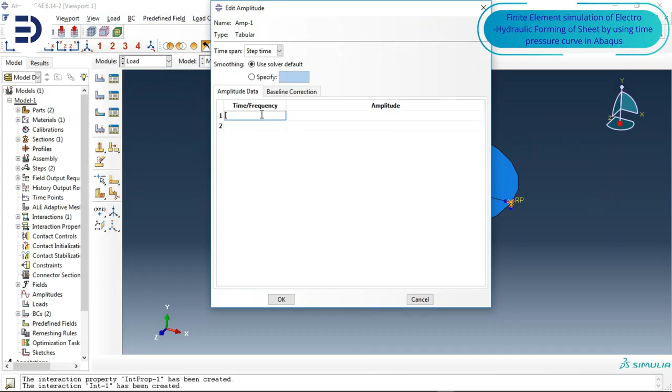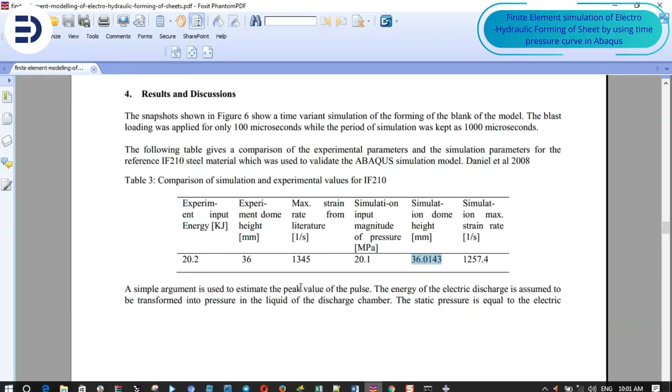Metal forming simulation and analysis is a specialized field of engineering that uses computational methods to model how metals deform during manufacturing processes. The primary objective is to predict material behavior under large plastic deformation, optimize process parameters, minimize defects, and improve final product quality while reducing reliance on costly and time-consuming physical prototyping.

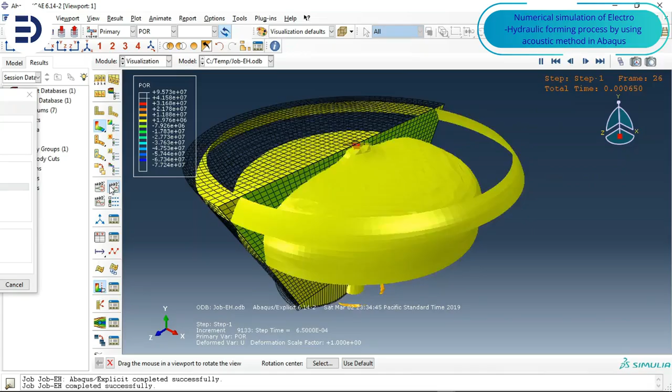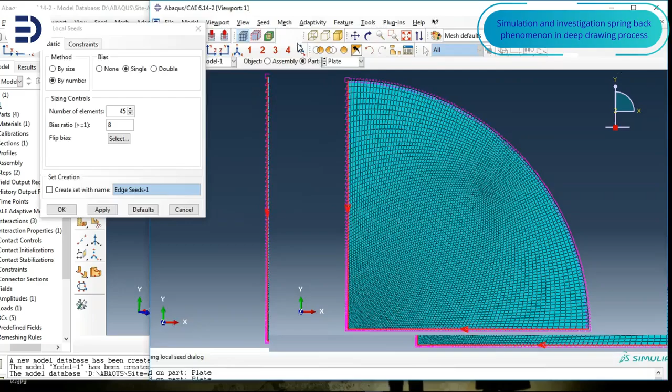Because these processes involve significant shape changes and complex material responses, accurate analysis is essential for efficient and reliable design. Simulating metal forming processes is particularly important because experimental trials often require large-scale machinery, expensive tooling, repeated trial-and-error adjustments, and substantial material consumption, with defects sometimes appearing only at late stages of development.

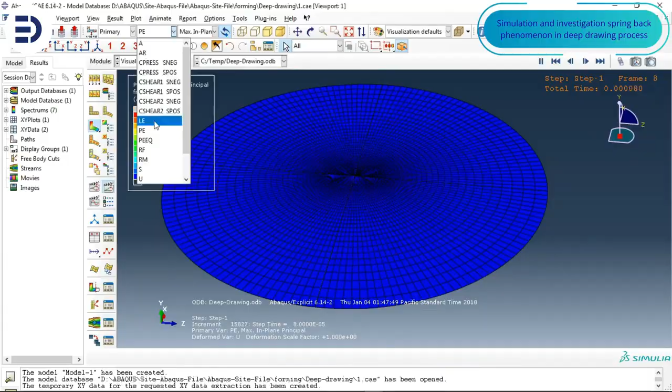Computational simulation allows engineers to predict material flow, identify potential defects at an early stage, optimize tooling geometry, reduce production costs and cycle time, and improve overall process safety and performance. By understanding how the material behaves throughout the forming sequence, engineers can make informed decisions before committing to physical production.

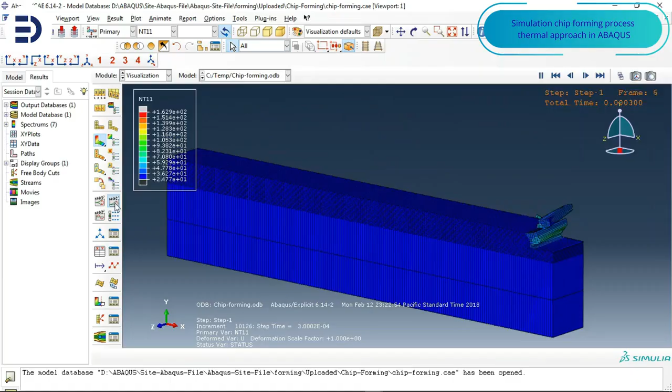Metal forming simulation is grounded in continuum mechanics and advanced material modeling. The mechanical behavior of metals undergoing plastic deformation is described using constitutive models that capture elastic plastic response, flow stress behavior, strain hardening characteristics, and when necessary, strain rate and temperature dependence. These models are critical for representing cold, warm, and hot forming processes.

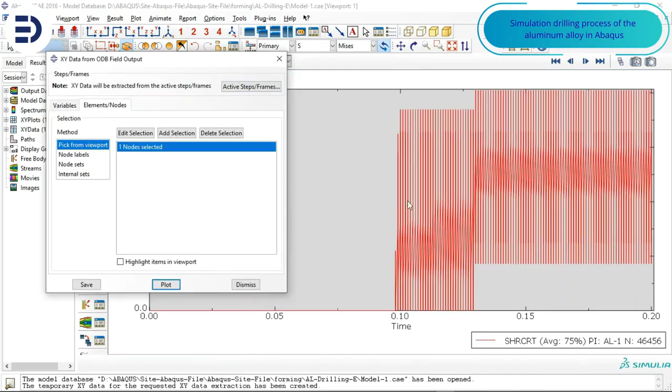Because forming operations involve extreme shape changes, simulations must account for large deformation mechanics using nonlinear kinematics and formulations such as updated Lagrangian or arbitrary Lagrangian-Eulerian methods. The interaction between tools and the workpiece also plays a central role, requiring accurate contact and friction modeling to represent shear stresses, lubrication effects, and in advanced analyses, tool wear.

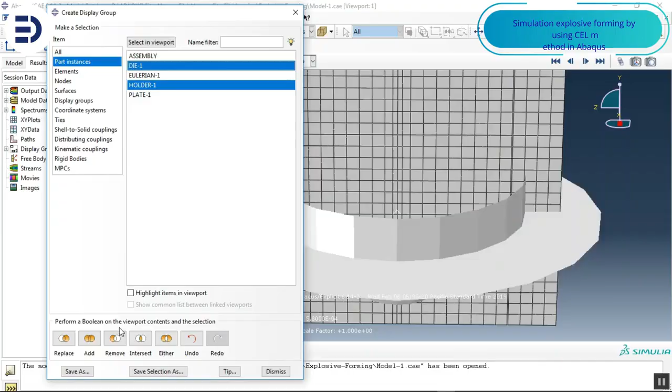In many forming processes, heat generation due to plastic work and friction significantly influences material behavior, making coupled thermomechanical simulation and heat transfer modeling an essential component of realistic analysis.

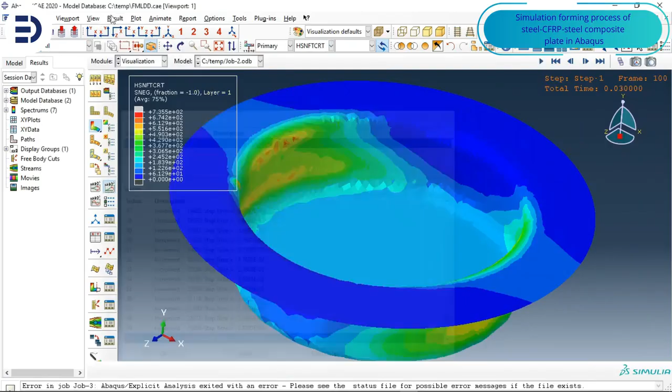Numerically, metal forming simulations are most commonly performed using the finite element method, which is well suited for predicting stress, strain, and deformation in both bulk and sheet metal forming. Implicit finite element formulations are often used for quasi-static processes such as deep drawing, where stability is important, while explicit formulations are preferred for highly nonlinear or dynamic operations such as forging.

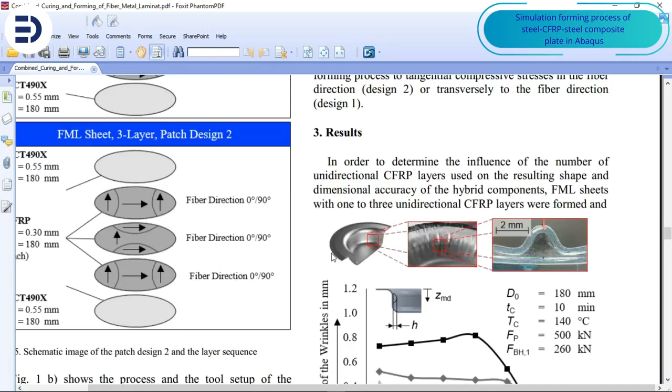In cases involving extremely large deformations where mesh distortion becomes excessive, alternative approaches such as finite volume methods or mesh-free techniques like smoothed particle hydrodynamics may be employed to maintain numerical robustness.

The outputs of metal forming simulations provide engineers with detailed insight into material flow and final part geometry, strain and strain rate distributions, residual stresses, and thickness variations in sheet metal components.

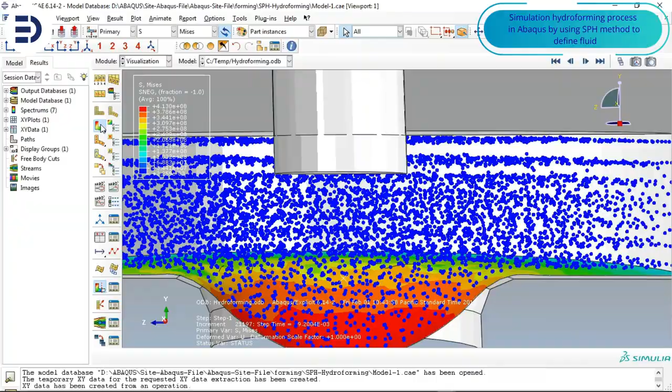Simulations also enable prediction of common forming defects such as wrinkling, tearing, springback, cold shuts, and folding, as well as estimation of tool forces and potential wear. These results are directly used to refine tool design, adjust process speed, select appropriate lubrication strategies, and control forming temperatures to achieve the desired product quality.

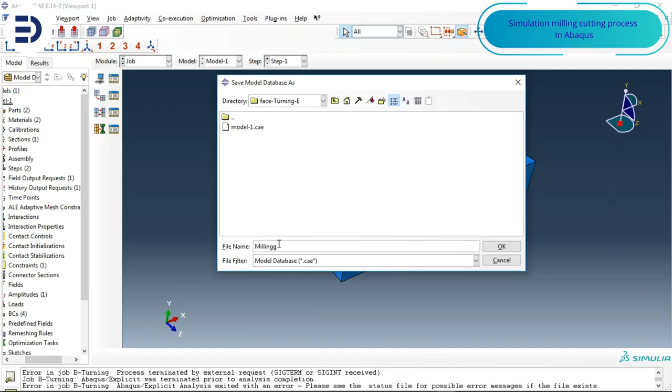A wide range of commercial software tools supports metal forming analysis, each tailored to specific applications such as sheet metal forming, bulk forming, forging, or highly nonlinear dynamic processes.

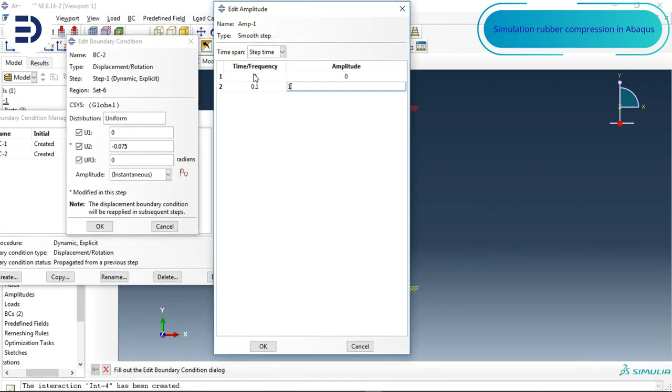In recent years, the field has continued to evolve through innovations such as AI-assisted process optimization, digital twins of manufacturing lines, multi-scale material modeling, advanced damage and failure criteria, real-time simulation for process control, and hybrid modeling of additive and forming processes. These developments are steadily increasing the accuracy, efficiency, and industrial relevance of metal forming simulations.

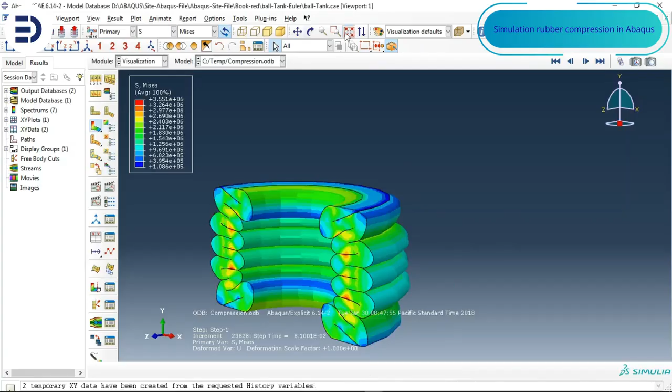Overall, metal forming simulation and analysis has become an essential component of modern manufacturing engineering. By integrating material science, nonlinear mechanics, and numerical modeling, it enables industries to design efficient and reliable forming processes while reducing cost and improving product performance.

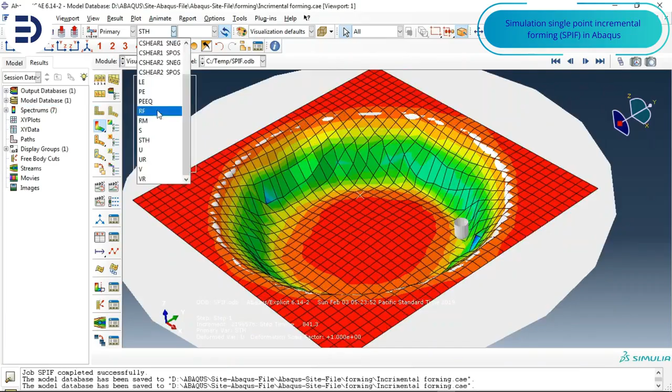In this comprehensive course, you will explore both fundamental principles and advanced applications of forming analysis and simulation using Abaqus software. Through 15 detailed, hands-on tutorials, you will gain a strong theoretical foundation together with practical simulation experience. Each tutorial is supported by step-by-step video instruction, Abaqus model files, simulation codes, and a relevant research paper to reinforce learning.

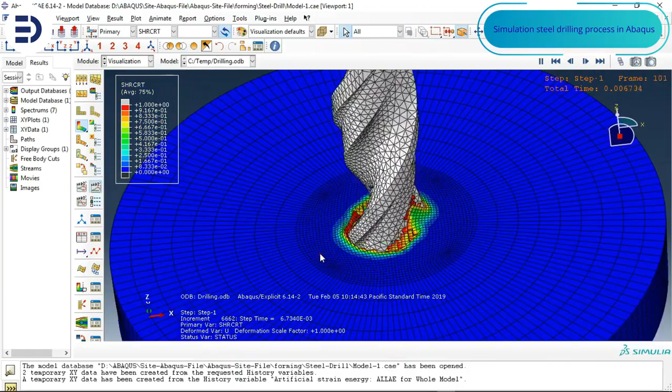The course spans a broad range of engineering applications, including CFRP forming processes, electrohydraulic forming using pressure, time models and acoustic methods, explosive forming, incremental forming, hydroforming analysis, chip formation, three-dimensional cold extrusion, drilling of aluminum and steel materials, milling cutting simulation, waterjet cutting analysis, rubber compression testing, crashworthiness analysis of aluminum profiles, and crushing analysis of foam aluminum tubes, providing a comprehensive view of metal forming behavior across diverse manufacturing scenarios.